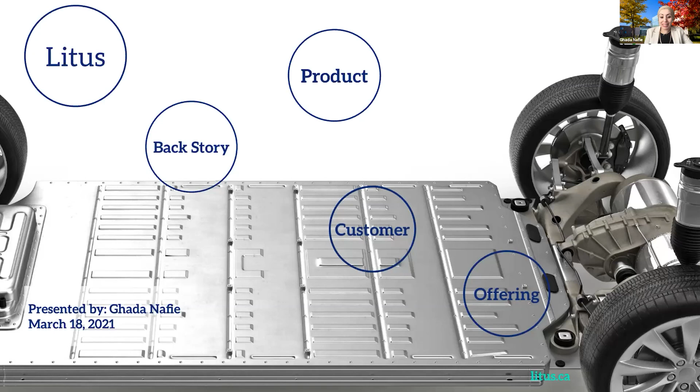Litus is a technology company that develops nanotechnology for energy applications. We enable producers to utilize our technology for more efficient production of lithium. We have recently developed breakthrough nanotechnology with the goal to inspire companies to produce energy solutions that are abundant, cleaner, more accessible, and most importantly, more efficient. We have a set of applications suitable for solving a number of energy challenges. We've decided to focus on lithium as our first area based on its increasing global importance.

My name is Ghada Nafie, and I'm a co-founder and the CEO of Litus. It's my pleasure to introduce the executive team of Litus.

Dr. Gerardo Vitali, CTO and co-founder. Dr. Pedro Pereira, co-founder and chair of our advisory board. Ryan McDonald, VP Strategy and Business Development. Werner Gartner, a board directors member. And Mohammed Abu Salim, chairman of the board of directors.

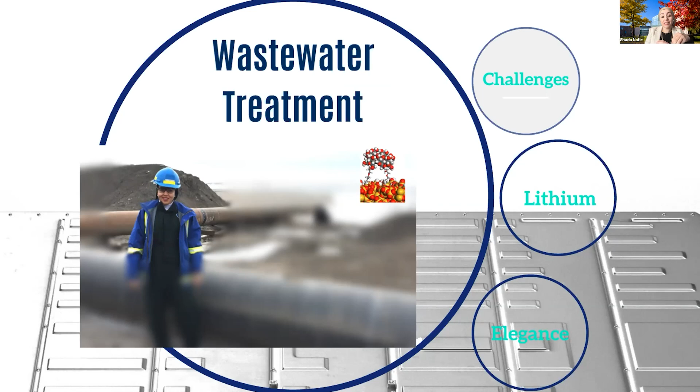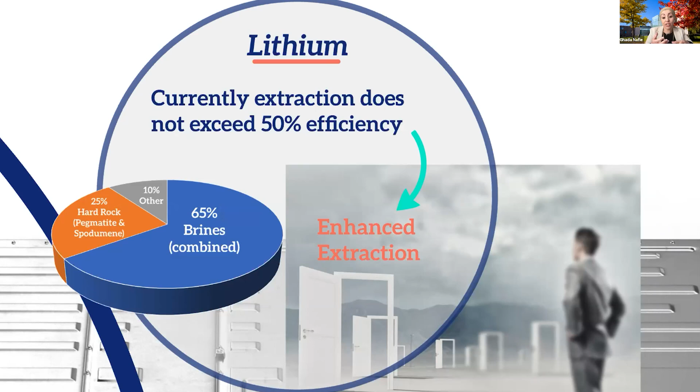With that, I've developed deep knowledge in designing and developing nanoparticles, which I've decided to specifically focus on energy and environment applications. Acknowledging the shift in the way the world consumes and produces energy, a shift that targets the use of natural resources to lower the carbon and other environmental footprints, and coming across lithium and the extraction process, especially noticing that existing technologies don't exceed 50% efficiencies. And that is from brines, which represent about 65% of lithium production, prompting a whole bunch of other areas, such as hard rock and others, to get that lithium to satisfy the demand today.

Noticing those low yields and energy-intensive processes, I saw an opportunity to enhance this extraction by making it selective to lithium and only lithium, and also increasing the purity of that lithium product. And I believe that could be achieved with nanotechnology.

But why nanocomposite particles? That's what we call them. They possess unique advantages that have been proven in many sectors related to energy and environment applications, including wastewater treatment, heavy oil upgrading, drug delivery, and polymer composites, among others.

They possess unique advantages such as rapid adsorption rate and high adsorption capacity, and of course they achieve that because they are so small. They are tiny particles with a huge surface area, and that enables them to have that high adsorption capacity. But also they are thermally stable at the temperatures we use them in.

They disperse very, very highly. So imagine putting those tiny particles in some aqueous medium. They will disperse very quickly and fast.

They are environmentally friendly, and what I mean by that is that the way we produce and synthesize them is very environmentally friendly. We don't use extensive processes. We prepare them at low temperatures and low pressures and ensure that the preparation method is very practical to make it feasible for commercial applications.

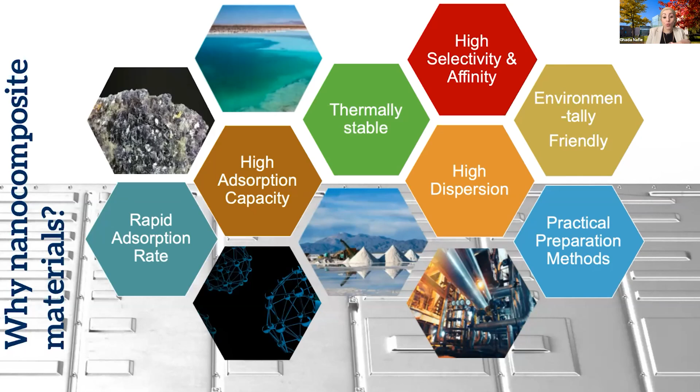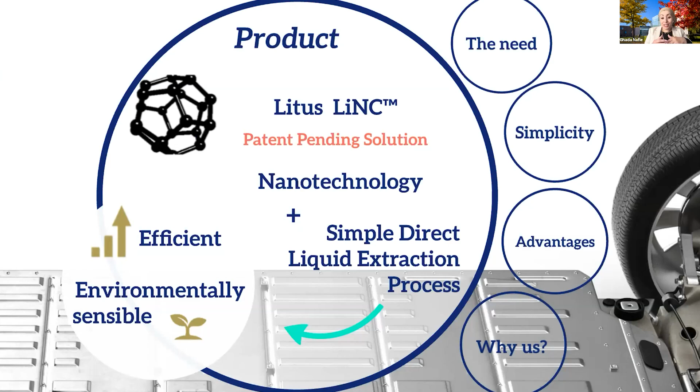At Litus, we have developed our product, Litus LiNC. It combines nanotechnology with a simple direct lithium extraction process to provide a very environmentally sensible and efficient solution to satisfy the need. I go back and reiterate the graphic that Benchmark just shared and developed.

I want you to look at the supply and how it looks. The operational supply is shown in that bottom category in orange, and you can see that over the years, it flattens.

Then we have a lot of other suggested sources, the highly probable, the possible, and all the other ones. These all bring us to a certain level, but taking everything into account, including secondary supply from recycling these batteries, you can see there's still a huge gap between where we are and where we can go. Litus is a company that developed a technology that can push those boundaries.

We can actually increase the efficiency of that extraction and recover more of the lithium present in the brines. We have developed that graphic on the left, showing the opportunity of tapping into the resources available with lithium.

So first we start with that bottom part for increasing the recovery of the reserves present today. You can see how enormous the economy of such resources looks like on the left, but also getting into the wells, identified wells, and the geothermal ones.

Imagine also tapping into other identified brine resources. So the more we can unlock lithium out of these resources that are somewhat not fully developed today with the new technology, the more we're increasing towards meeting that demand and also towards a bigger economy.

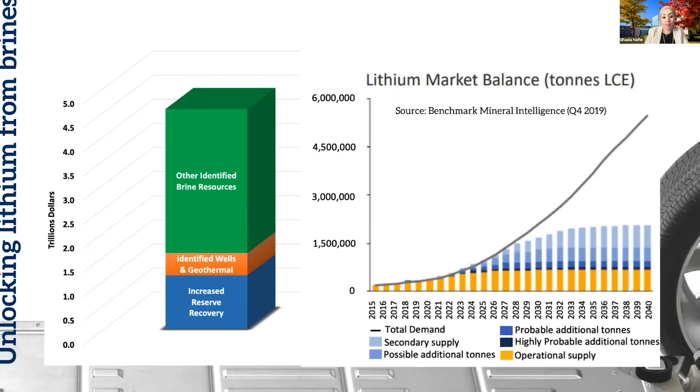I'm going to share with you what we have here and compare our process with the conventional. This is our breakthrough performance. So usually what you would have is the well brine.

With conventional processes, we build multi-stage solar evaporation, pumping all the water and leaving it in salars to evaporate. Then, based on the source and the brine itself, you can do one or a combination of processes shown at the bottom, involving solvent extraction, precipitation, filtration, redissolution, or ion exchange.

But at the end, the average concentration goes up to about 6,000 ppm. Moreover, this is not fully pure - it's not just lithium. It has a whole bunch of contaminants from cations also present in the source water, cations that are very difficult and challenging to separate from lithium, including magnesium, sodium, potassium, and calcium.

Having that requires many other processes afterwards to bring that to battery grade. Now with the Litus process, we're able to take the well brine water and send it to the Litus LiNC process. This is a process that does not take very long. We consider that as a one-stage process that takes place in a few hours to give us a lithium salt solution that is concentrated to up to between 17,000 to 22,000 ppm with a purity of 98%. What you see on the top there is our product, that is our lithium salt.

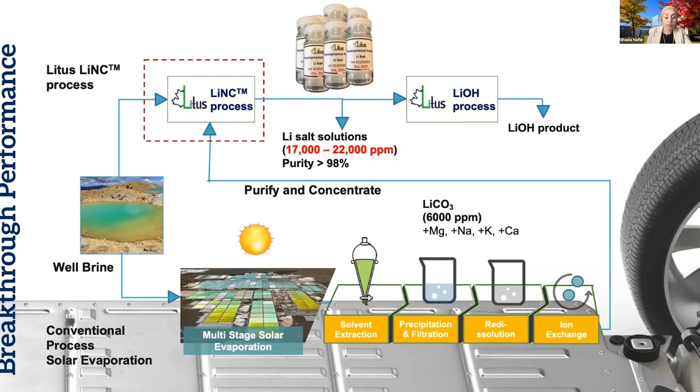We have several advantages to our process. Well, first, with the greater recovery, we're able to increase that recovery and increase the efficiency of lithium production. And we do it fast. It only takes a few hours. So you don't have to wait for about 18 to 24 months, like with conventional processes, for evaporation to take place. In just a matter of a few hours, you'll be able to get that first lithium product.

It is selective in the presence of high concentrations of competing ions. So with all of the ions present in the water, we're able to selectively extract the lithium, reduce greenhouse gas emissions, and we do that by having way fewer unit operations than a conventional process would have. We can reach the result in a fairly simpler process.

We provide a robust, durable, and scalable process. So we understood all of the challenges that have gone into other technologies, and we were able to develop a material that has the robustness and durability, and that would be available for commercial applications, but also provided with high purity.

And most of all is that, with evaporation ponds, you have to evaporate water, and in a lot of places this is drinking water. So rather than doing that, you can preserve that source water by going through the Litus process, which also uses low amounts of fresh water during the process itself.

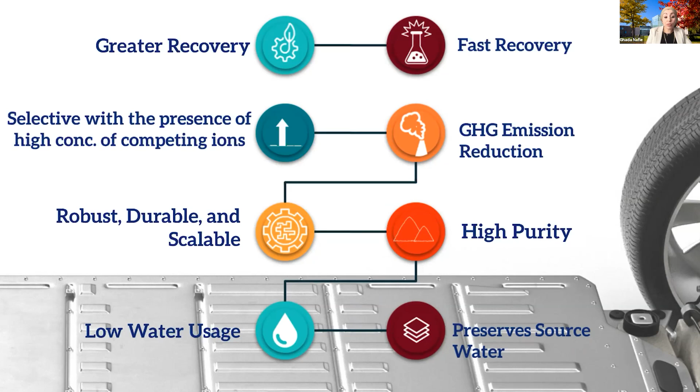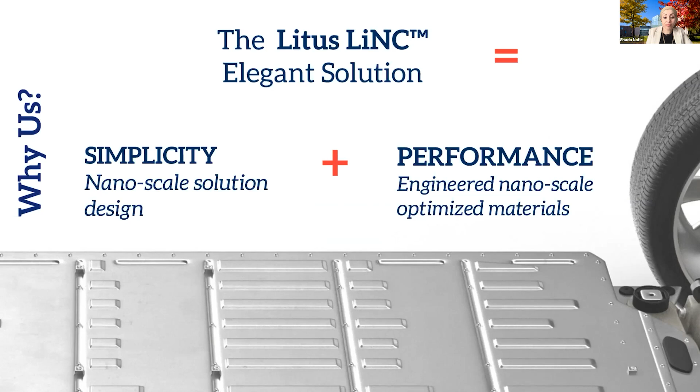We are ready to deploy. We would like to partner with existing lithium producers, plant facility developments, and exploration companies. We would love to connect and have partners to look at building something together and show you the performance of Litus.